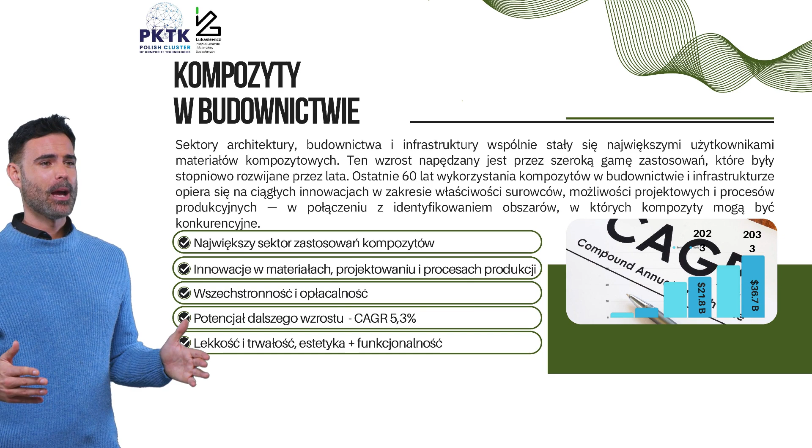The 1960s marked a breakthrough in the use of composites in construction. The Les Échanges Pavilion in Switzerland, designed by Heinz Hossdorf in 1964, was a pioneering example of using self-supporting GFRP roof structures with a wide span. Reinforced plastic with fiberglass allowed for a radical reduction in structural weight while maintaining exceptional strength.

Simultaneously, the Futuro house in Finland, created by Matti Suuronen in 1968, demonstrated the potential of composites in prefabrication. This modular residential home, made of polyester resin reinforced with fiberglass, showcased the possibilities of mass-producing lightweight residential structures.

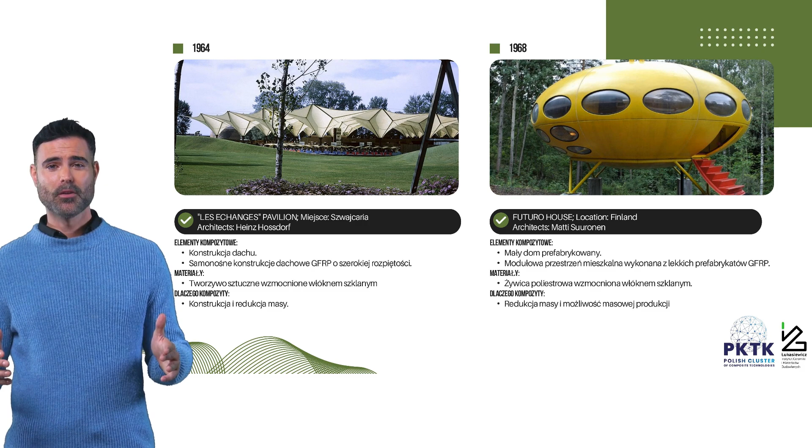In the 1970s and 1980s, there was significant development in the application of GRC, glass-reinforced concrete, composites in prefabricated facade panels. An example of this trend is the Presidential Palace in Abu Dhabi from the 1970s, where GRC panels with significantly lower weight compared to traditional concrete panels were used. GRC technology with alkali-resistant fiberglass enabled the creation of lightweight domes for mosques and palaces, revolutionizing the region's sacred architecture.

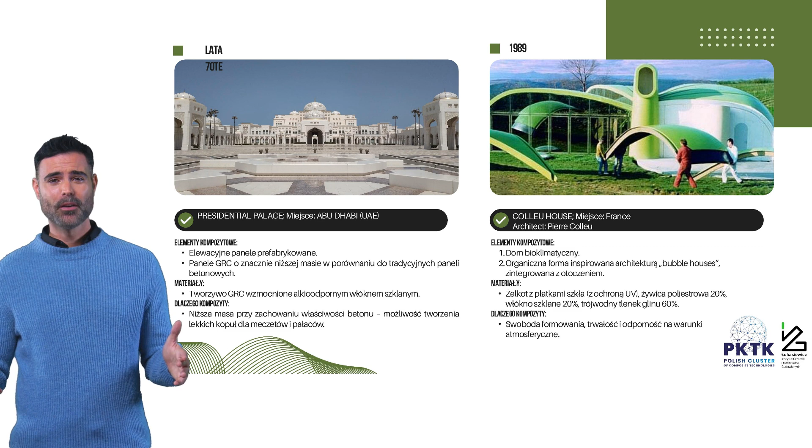Simultaneously, in France, the Colleu house by Pierre Colleu was built, demonstrating organic forms inspired by bubble house architecture, integrated with the surrounding environment. The period from 2010 to 2012 brought groundbreaking achievements on a global scale.

The Guangzhou Opera House in China, designed by Zaha Hadid Architects, utilized fiberglass as reinforcement in an alpha gypsum matrix. A form resembling two pebbles was realized using patented high-temperature wax molding technology, where the CNC process allowed for wax recycling.

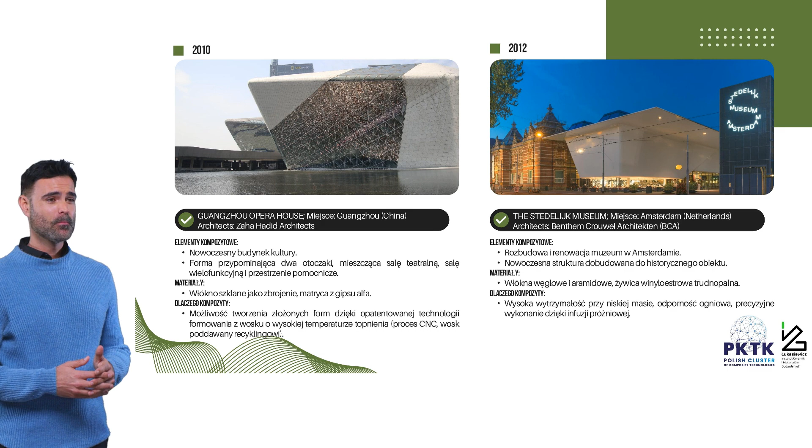In Amsterdam, the Stedelijk Museum by Benthem Crouwel Architects demonstrated advanced capabilities of carbon and aramid fibers in fire-retardant vinyl ester resin. High strength at low weight and fire resistance were achieved through precise vacuum infusion technology.

The bridge infrastructure has become another field of the composite revolution. The Foryd Harbour Bridge in Rhyl Harbour, North Wales, has showcased an innovative approach to bridge construction with two mirror-image spans since 2013. 30-meter platforms lifted by ropes utilized multi-layered fiberglass, E-glass, with a structural foam core and localized reinforcements made of unidirectional carbon fiber. The reduction in weight allowed for shorter lifting times and decreased energy consumption, demonstrating the economic benefits of composites in infrastructure.

The Museum of Modern Art in San Francisco, since 2016, has demonstrated the potential of composites in building expansion. A wavy white fiberglass facade with polyester resin eliminated the need for 500 tons of steel support structures.

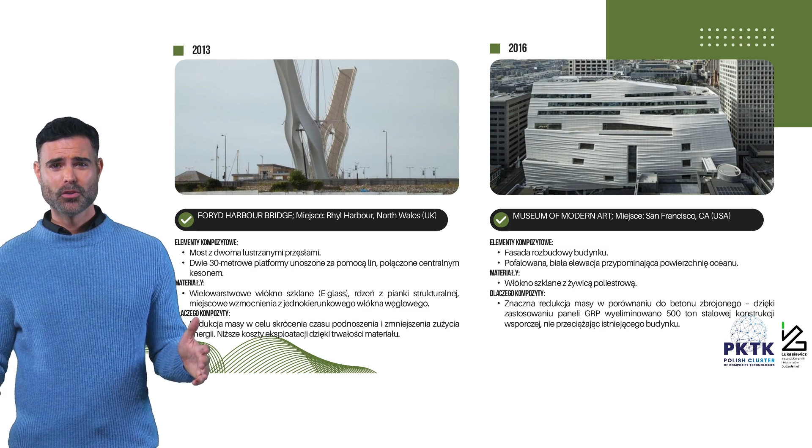Steve Jobs Theater in Cupertino, a work of Foster + Partners from 2017, set new standards in the application of CFRP, carbon fiber reinforced polymer. The roof, composed of 44 carbon fiber panels, each 23 meters long, was assembled in just 2.5 hours. High efficiency with minimal weight and no internal supports demonstrated the capabilities of composites in creating spectacular architectural spaces.

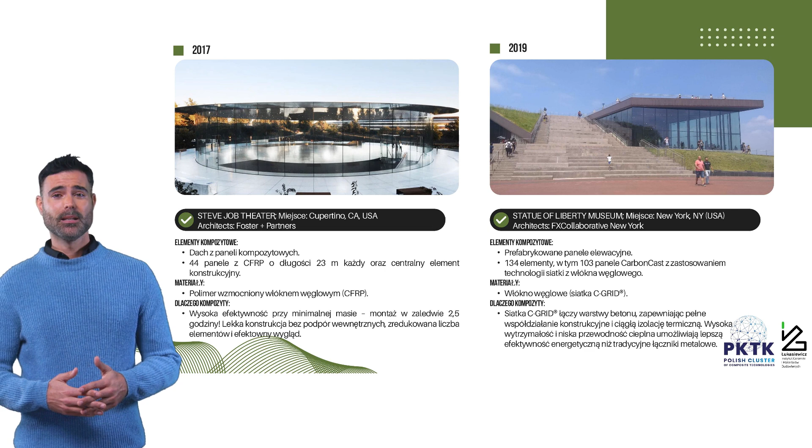The Statue of Liberty Museum in New York from 2019 utilized 134 prefabricated CarbonCast panels with C-grid carbon fiber mesh technology. This system provided full structural cooperation and continuous thermal insulation with better energy efficiency than traditional metal connectors.

The UAE Pavilion at Expo 2020 in Dubai, designed by Santiago Calatrava, demonstrated the potential of composites in creating dynamic, moving elements. The 65-meter wings made of a hybrid coating of carbon fiber and glass allowed for the unveiling of solar panels in a way that would be impossible with traditional materials.

Carbon Haus in Dresden was a breakthrough as the world's first structure made of carbon fiber reinforced concrete. Its resistance to corrosion allowed for a reduction in element thickness, making the structure 4 times lighter than traditional steel-reinforced concrete. This enabled the creation of lightweight, flowing forms that support sustainable construction.

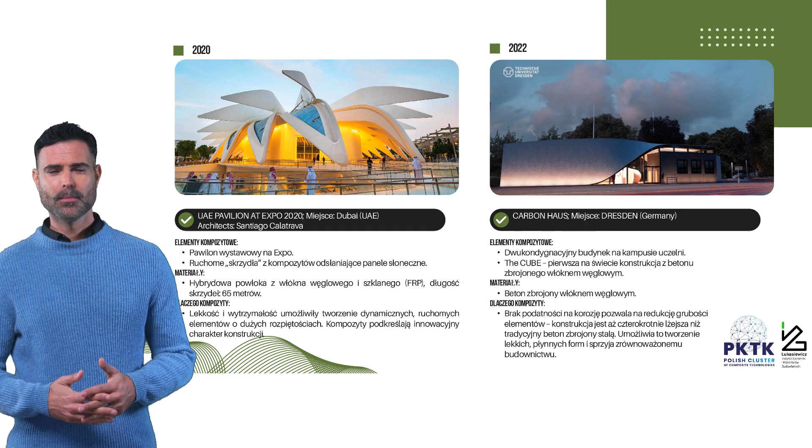The Cité Scolaire Internationale Jacques Chirac in Marseille, in 2024, utilized panels made from polyester resin reinforced with fiberglass and Amplitex material, B-Comp, formed using RTM technology. The exterior cladding providing shading for the school building demonstrated durability, weather resistance, and compliance with fire safety requirements while maintaining lightness and a modern appearance.

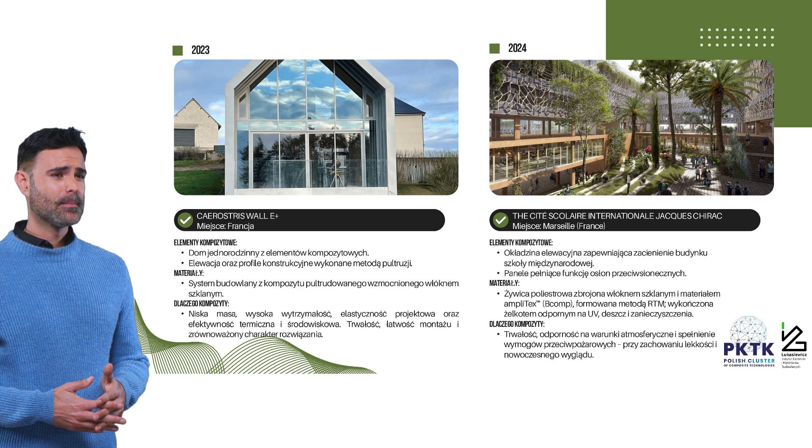Harker's Island Bridge in North Carolina from the year 2024 represents a new generation of composite infrastructure. Replacing 2 outdated crossings as part of the NC-DOT project, it utilized beams made of carbon fiber, reinforced concrete, and deck slab reinforcement with fiberglass. Carbon fiber increased tensile strength and reduced the weight of the structure, while fiberglass in the bridge deck provided durability and corrosion resistance in demanding environmental conditions.

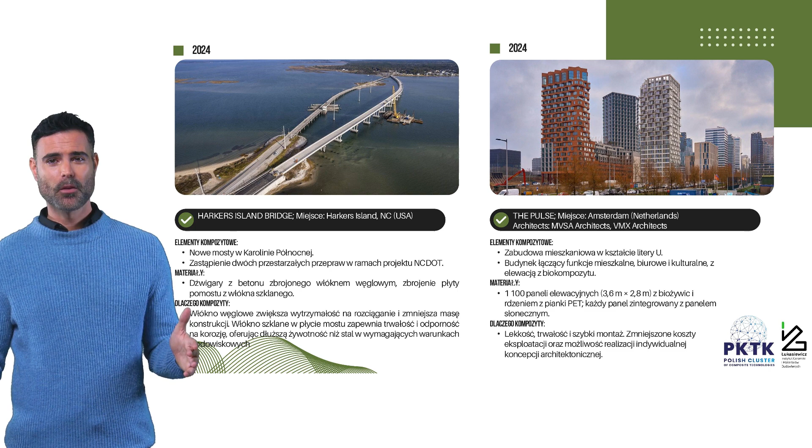The Pulse in Amsterdam from the year 2024 demonstrated the integration of biocomposites with photovoltaics: 1100 facade panels measuring 3.6 meters by 2.8 meters with bioresins and PET foam cores, each integrated with a solar panel.

On this slide, I would like to highlight the groundbreaking project, the Blue Ocean Dome. The Blue Ocean Dome is the first dome in the world made entirely from CFRP composite, a lightweight yet exceptionally durable material. Its realization required advanced testing and innovative solutions, demonstrating how modern composites are revolutionizing architecture and engineering.

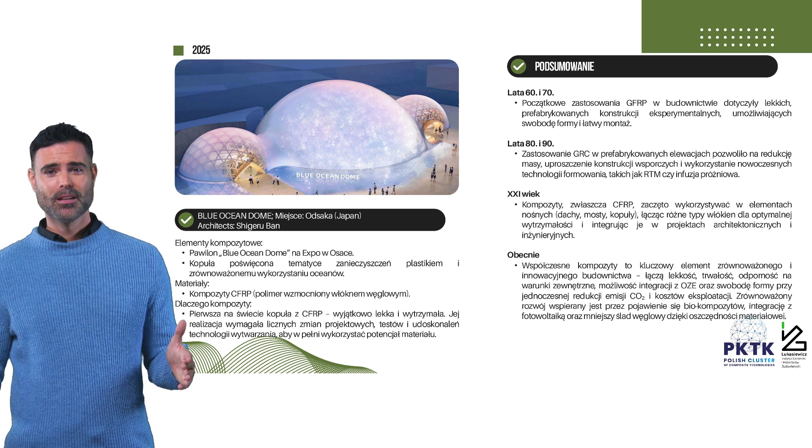The development of these materials in construction began in the 1960s and 1970s with the use of GFRP in lightweight prefabricates. In subsequent decades, GRC, glass fiber reinforced concrete, emerged, revolutionizing facades and molding techniques. In the 21st century, composites, especially CFRP, started being used in load-bearing elements, roofs, bridges, domes, combining different fibers for maximum strength. Today, composites are key to sustainable construction, durable, lightweight, weather-resistant, increasingly integrated with renewable energy sources, and produced from biomaterials. They are the materials of the future, both functional and ecological.

The scale of global climate and migration challenges is unprecedented. In 2008, the number of city residents for the first time exceeded the number of people living outside them, and by 2050, it is projected that 68% of the world's population will live in cities. Every year, about 20 million people move to cities in Africa, and by 2030, the population of Dar es Salaam will increase to 11 million, while Lagos and Cairo will each reach 24 million residents.

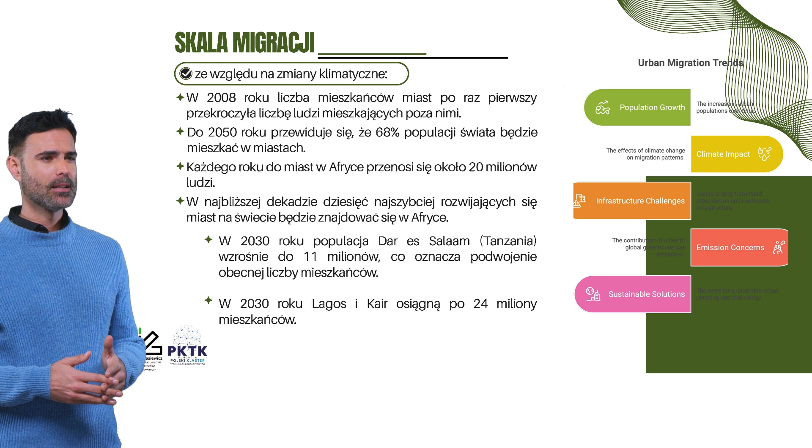Climate change is driving migration. People are leaving regions affected by droughts, floods, and extreme weather conditions. Urban heat islands cause temperature increases in cities of up to 3 degrees Celsius higher than in surrounding areas, and cities account for 75% of global greenhouse gas emissions.

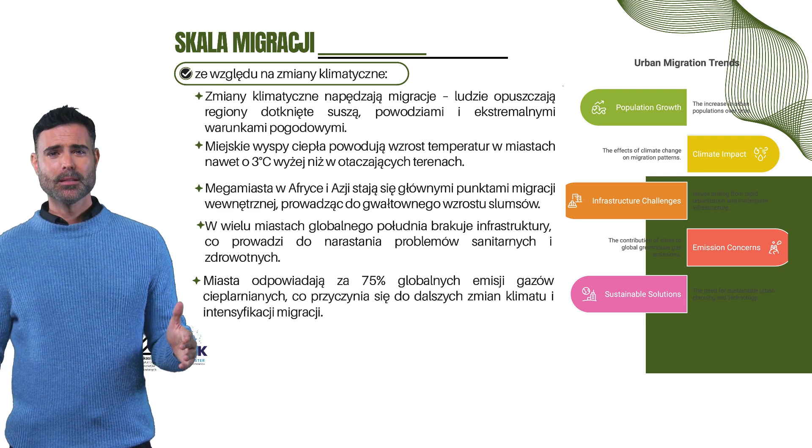Migration affects demography, the economy, and culture. The increase in the number of migrants requires understanding their needs and integration. Creating policies that support diversity and inclusion is essential, as this can lead to innovation and economic growth. Challenges include resource management and ensuring social balance.

On this slide, I present 4 key challenges shaping the future of construction. In rapidly growing cities, demands on space, infrastructure, and the environment are increasing. Therefore, innovative, sustainable solutions are essential. Social planning. Construction today is more than just building structures. It's about creating spaces that promote integration, quality of life, and genuinely meet residents' needs.

Urbanization. More and more people are moving to cities, which requires the rapid and thoughtful development of housing, transportation, and services. This challenge demands smart planning and modern technologies. Climate change. Extreme weather events force a new approach to design. Buildings must be energy efficient, weather resistant, and environmentally friendly. Resource shortage. Depleting natural resources are prompting the industry to adopt low-emission materials, recycling, and circular economy practices. Efficiency and innovation will become key for further development.

Materials for the future of construction must meet 4 key criteria: climate adaptation, CO2 reduction, recyclability, and energy efficiency of buildings. Climate adaptation requires adjusting materials to extreme weather conditions, which will become more frequent. CO2 reduction through new technologies and materials is crucial, as construction accounts for 38% of global carbon dioxide emissions. Recycling and reusing materials to reduce construction waste is becoming a priority for the circular economy. Designing buildings that minimize energy consumption through advanced thermal insulation and energy management systems will become standard.

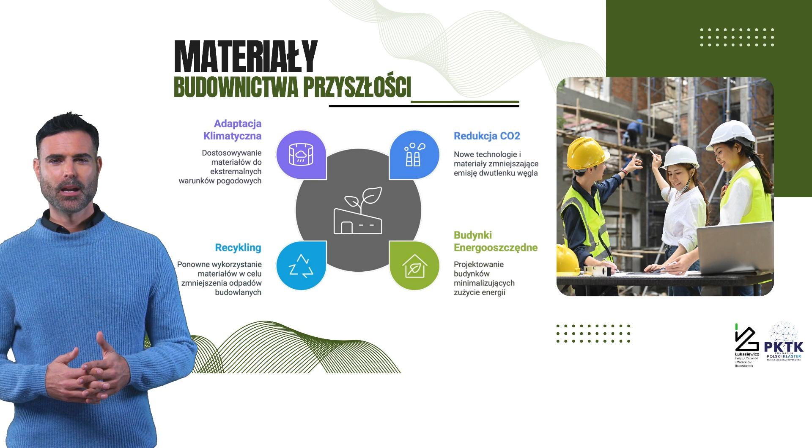Composites play 4 key roles in the construction of the future. First, their lightness and strength enable the reduction of structural weight while maintaining or increasing load-bearing parameters. Composites can be up to 75% lighter than steel while maintaining similar strength. Second, their corrosion resistance ensures the longevity of buildings, eliminating issues related to corrosion of steel reinforcement, which is a main cause of concrete structure degradation.

Third, prefabrication and rapid assembly revolutionize the construction process. Composite elements can be manufactured in controlled factory conditions and quickly assembled on site. Fourth, they enhance the energy efficiency of facades and insulation through their excellent thermal and acoustic insulation properties.

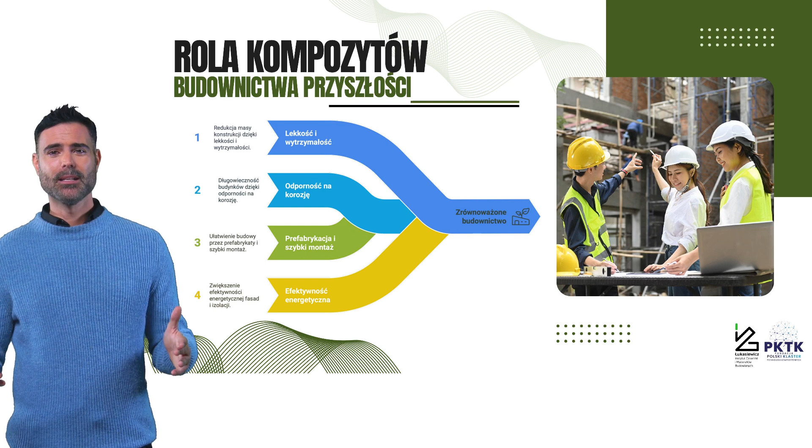4 key innovations are shaping the future of composites in construction. Biocomposites offer eco-friendly alternatives. Materials that combine natural fibers with advanced polymers open new possibilities in designing sustainable structures. 3D printing is revolutionizing construction processes, enabling the creation of complex structures directly on the construction site.

Integration with renewable energy sources promotes sustainable development. Composite panels integrated with photovoltaics are becoming the standard in modern investments. Smart structures introduce advanced responsive materials equipped with sensors for self-diagnosis of structural damage and real-time monitoring of the condition of the construction.

In traditional construction, concrete, steel, and ceramic brick account for nearly 50% of CO2 emissions over the building's life cycle. The use of sustainable materials, including composites, can significantly reduce the building's carbon footprint by 14% to 45%. The application of composites allows for reducing CO2 emissions in several ways. Reducing mass means lower logistical and transportation requirements and eliminates the need for massive foundations.

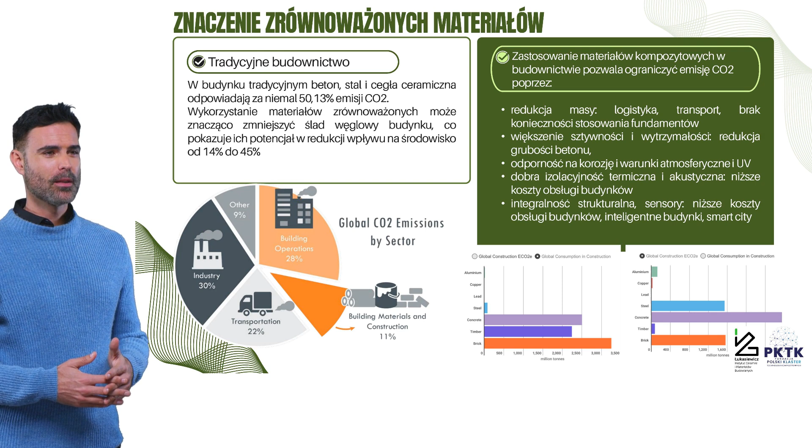Increasing stiffness and strength enables a reduction in concrete thickness, and corrosion resistance eliminates the need for maintenance. Good thermal and acoustic insulation translates into lower building operation costs, and structural integrity with sensors enables smart buildings and smart cities. Polish Composite Technology Cluster offers a wide range of composite products for construction.

Structural profiles include beams, columns, and panels that enable the creation of lightweight, durable load-bearing structures. Composite reinforcement in the form of rods and meshes replaces traditional steel reinforcement, providing resistance to corrosion and extended lifespan of structures. Facades and cladding made of composites offer excellent aesthetic and functional properties with minimal maintenance requirements.

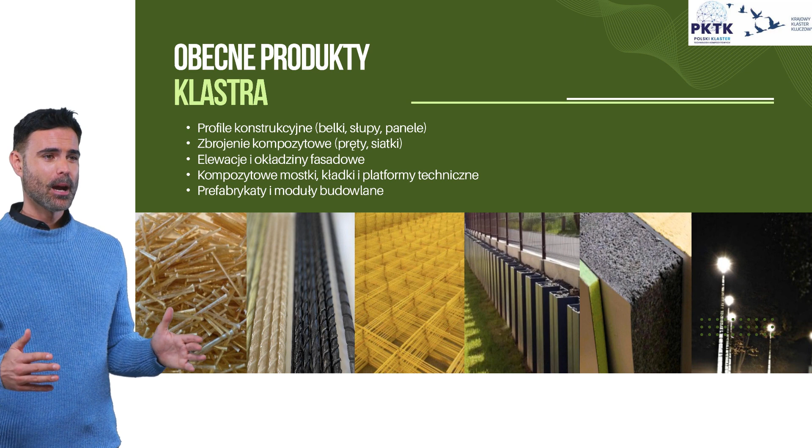Composite bridges, walkways, and technical platforms provide safe, durable infrastructure solutions. Prefabricated and modular building components allow for rapid project implementation while maintaining high-quality workmanship.

The Polish Composite Technology Cluster was established in 2017 and has held the prestigious status of a national key cluster since 2021. The organization unites over 136 members from across Poland, focusing on innovation, ecology, and green energy. The cluster actively collaborates with regional administration and international partners, developing modern composite technologies and promoting Polish companies on the international stage.

Total sales revenue of all cluster members in the last 2 fiscal years exceeded 5 billion zloty, employing over 17,000 workers. The organization is open to international cooperation and joint projects in the field of composite materials and technologies. The cluster actively collaborates with the Polish Investment and Trade Agency and the national key clusters in Poland, as well as with composite clusters in Europe and worldwide.

The organization co-hosts key industry events in Poland and Europe, such as Composites Expo, LightCon, and the Global Industry JEC Central Europe Forum. Intensive activities within the European Cluster Collaboration Platform, ECCP, and involvement in the Vanguard Initiative, Hydrogen and Offshore, position the cluster as an innovation leader in Europe.

The cluster is also an ambassador of the Amulet Liaison Office, a partner of the Optimat Innovation Network, a member of EuCIA, European Composites Industry Association, and a partner of the Rescue for EU project and website. The Composite Technologies Cluster organizes virtual meetings on its own platform, trade shows, and conferences, promoting advances in composite technology.